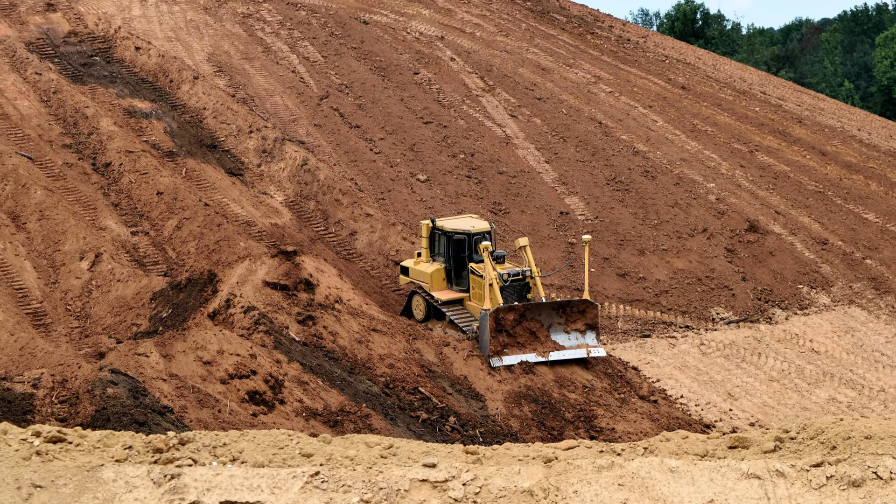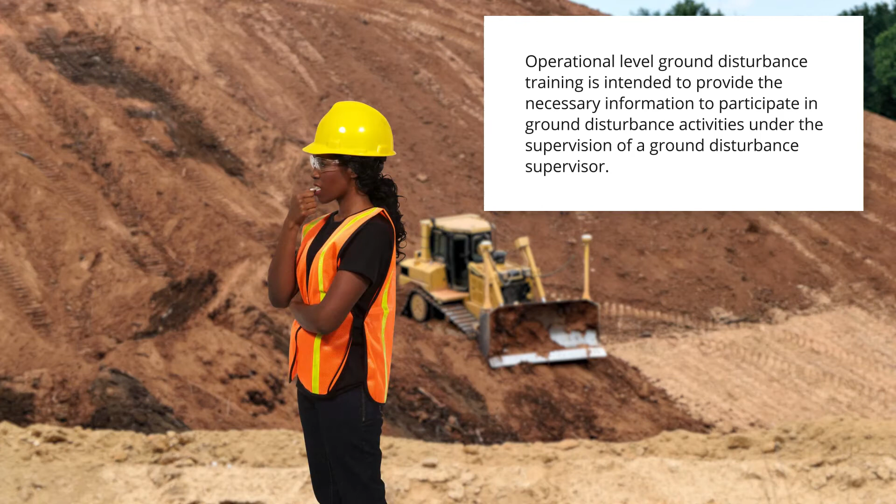This course covers what is known as operational level training. Operational level ground disturbance training is intended to provide the necessary information to participate in ground disturbance activities under the supervision of a ground disturbance supervisor. Therefore, this program is not intended for any individuals who will be conducting a ground disturbance without supervision.

The information presented in this program includes basic regulatory requirements for workers and widely accepted industry practices that have been proven to contribute to damage prevention.

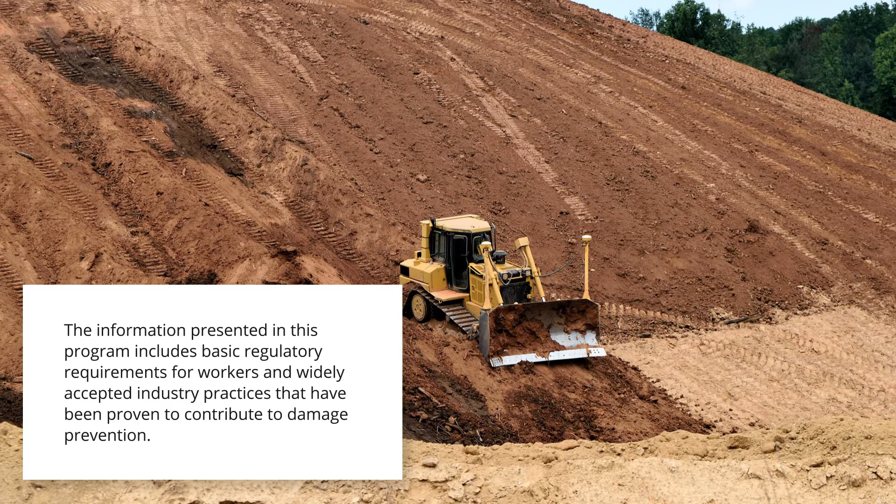All of this information has been put together in accordance with the Utility Safety Partners, or USP, Ground Disturbance 101 standard. This assures that learners receive consistent, accurate, and appropriate minimum content that is endorsed by all stakeholders. The USP has two standards to ensure ground disturbance training courses contain standardized content, correctness of information, and are delivered in a professional manner.

These two standards include Ground Disturbance 201 for programs with content appropriate for those supervising a ground disturbance, and Ground Disturbance 101 for programs with content appropriate for individuals working on a ground disturbance site.

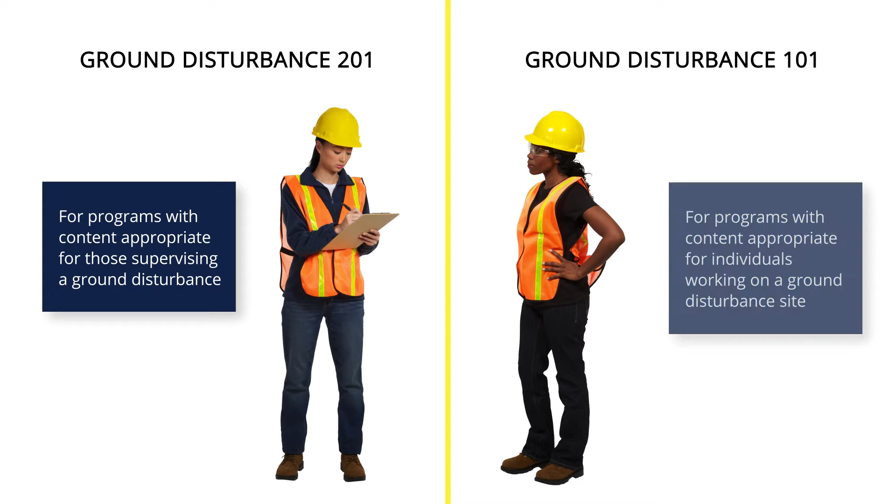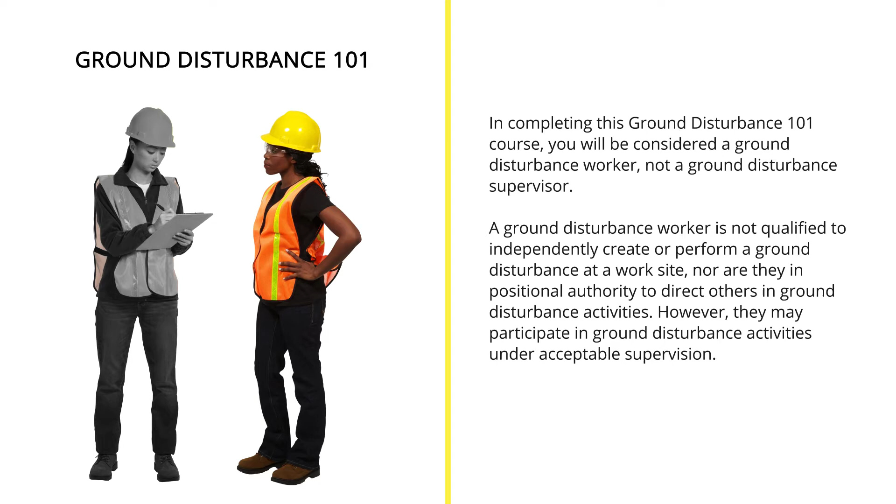In completing this Ground Disturbance 101 course, you will be considered a ground disturbance worker, not a ground disturbance supervisor. A ground disturbance worker is not qualified to independently create or perform a ground disturbance at a work site, nor are they in positional authority to direct others in ground disturbance activities. However, they may participate in ground disturbance activities under acceptable supervision.

By the end of this course, you should be able to explain the importance of damage prevention and what the consequences are if buried facilities are damaged, identify key ground disturbance stakeholders, explain the importance of competency and the role training plays in it, define ground disturbance, explain the functions of a code of practice, identify potential ground disturbance hazards and their controls.

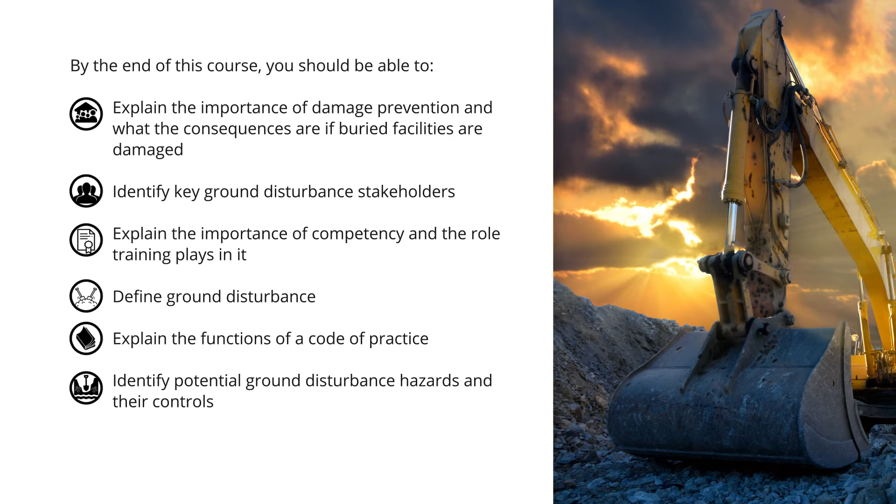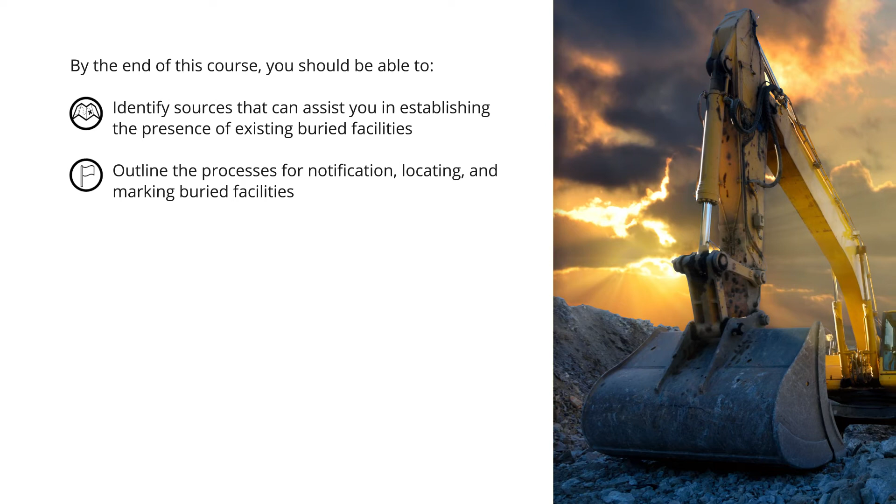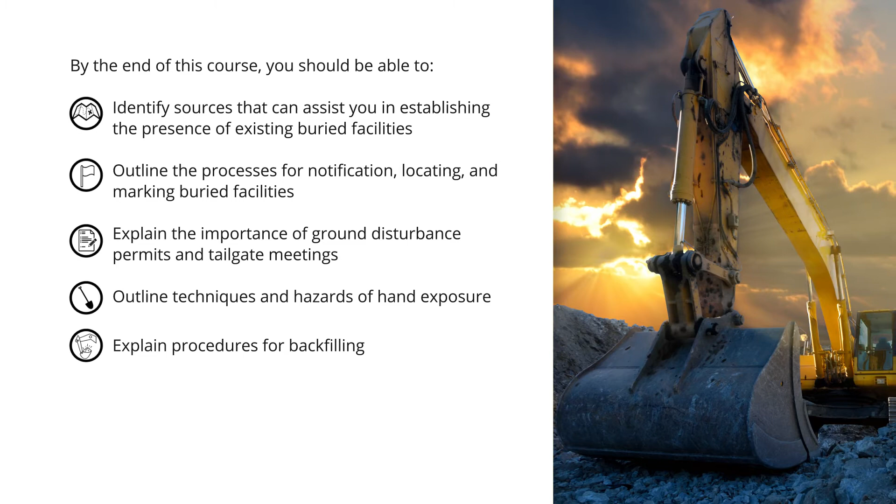Explain the importance of and requirements for emergency response plans, identify sources that can assist you in establishing the presence of existing buried facilities, outline the processes for notification, locating, and marking buried facilities, explain the importance of ground disturbance permits and tailgate meetings, outline techniques and hazards of hand exposure, explain procedures for backfilling, and explain what to do if damage occurs.

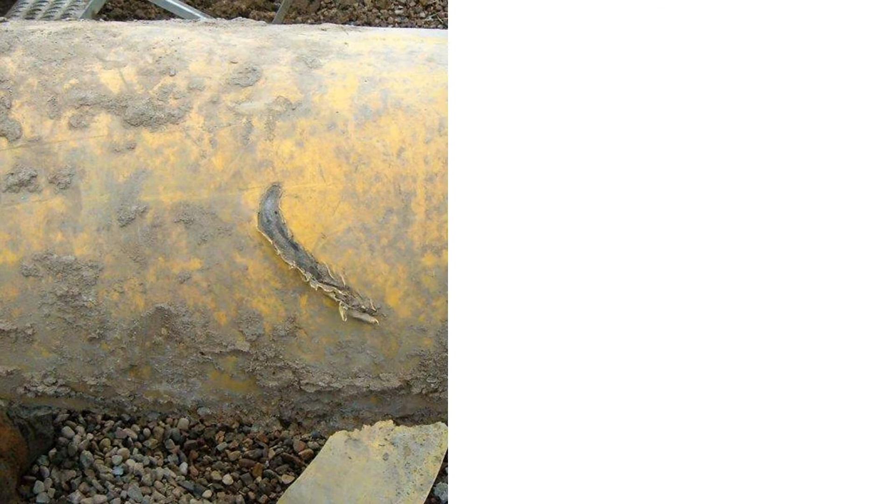Information will be covered in 4 chapters. Chapter 1, Damage Prevention. Chapter 2, Ground Disturbance Planning. Chapter 3, Preparing for a Ground Disturbance. And Chapter 4, The Execution and Completion of a Ground Disturbance.

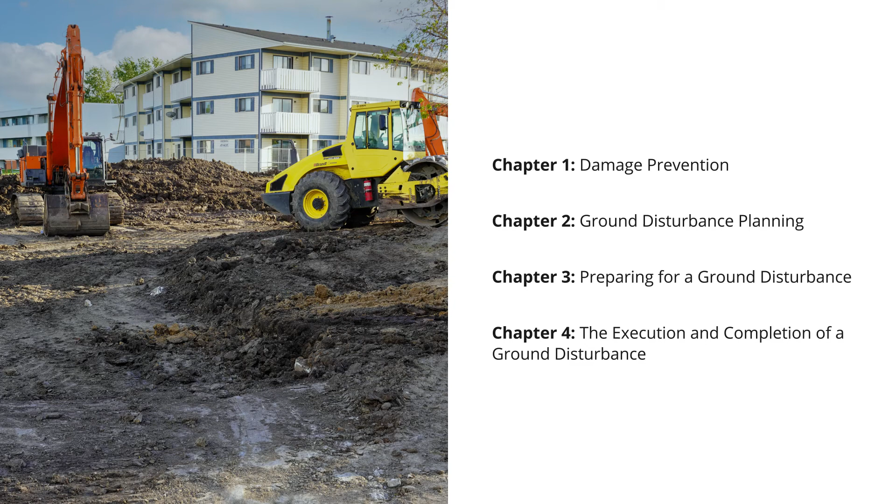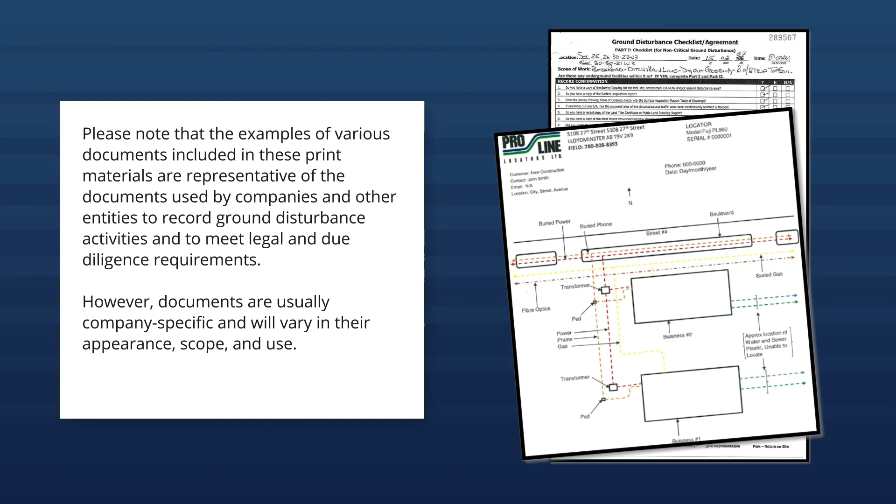Throughout this course, you will see samples of ground disturbance documents and will be given takeaway print materials for reference. Please note that the examples of various documents included in these print materials are representative of the documents used by companies and other entities to record ground disturbance activities and to meet legal and due diligence requirements. However, documents are usually company-specific and will vary in their appearance, scope, and use.

Employers and workers should note that the successful completion of a ground disturbance training program endorsed to this standard does not indicate or prove competency to participate in a ground disturbance. Operational level ground disturbance training is only one aspect of the training that a ground disturbance worker needs to have.